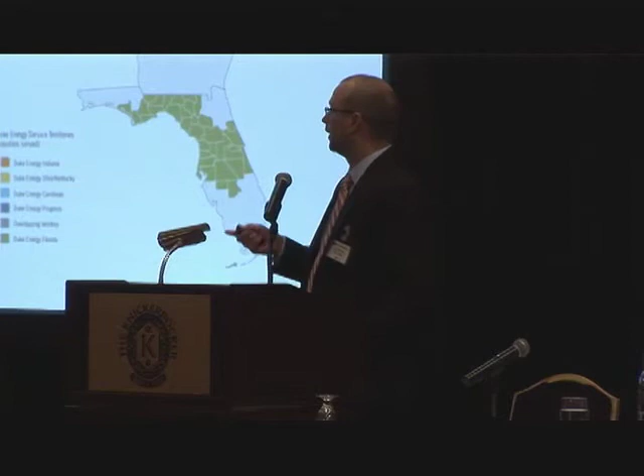If you look at our fuel mix across the entire company, it's about a third nuclear, a third coal, a third gas, but that doesn't always tell the whole story. You have to look jurisdictionally. In the Midwest and Indiana, we're really heavy coal. In the Carolinas, we've really worked over the last few years to have a good blend, so that's probably our most balanced jurisdiction. In Florida, we're kind of heavy gas, with only a few coal units left. So yes, we're a balanced company overall, but we have that fuel mix challenge, which a lot of folks talked about throughout the morning.

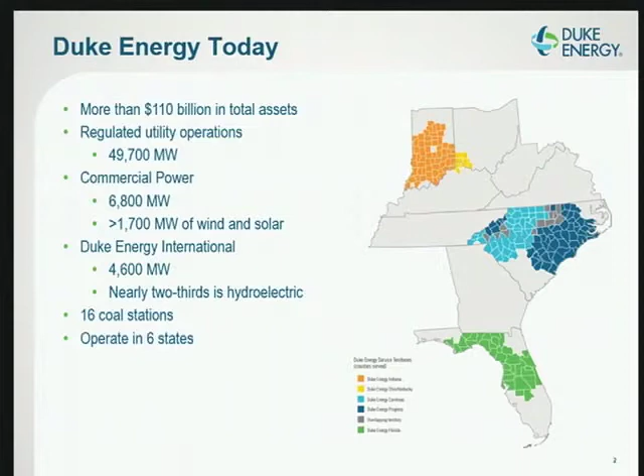This morning there was a lot of great discussion, a lot of high-level, fleet-level type stuff. I think we're going to take it into some more detail to piggyback on what Mr. Shea said. I'm an engineer, not a lawyer, so I'm going to focus on the technical aspects. As I go through the effluent guidelines, we commented heavily on this rule, and we have a lot of unique experiences to offer. So today I wanted to outline some of Duke's comments on the rule and how it was proposed. Hopefully you guys find that valuable, and hopefully it sparks some discussion.

So I'll talk about the rule, and talk about what a typical power plant impact might look like. Then I wanted to narrowly focus on two areas: FGD wastewater treatment, and compliance with effluent guidelines combined with the CCR rules. There's really a link between those two related to ash management, and I wanted to highlight those as well. I won't touch on every bit of the rule, but you'll get a flavor. I wanted to focus on those two things because they're probably the most important, or probably the biggest impacts.

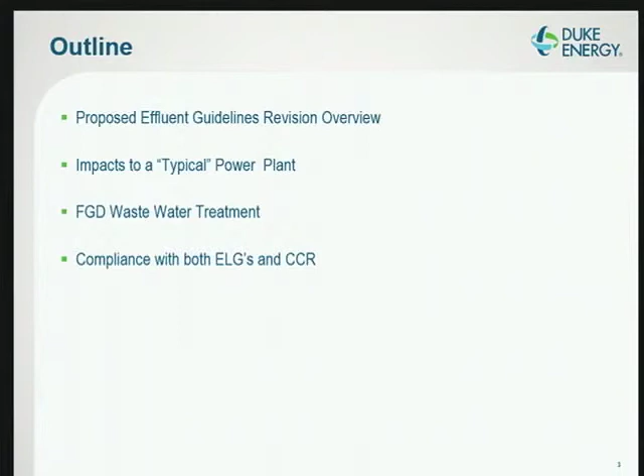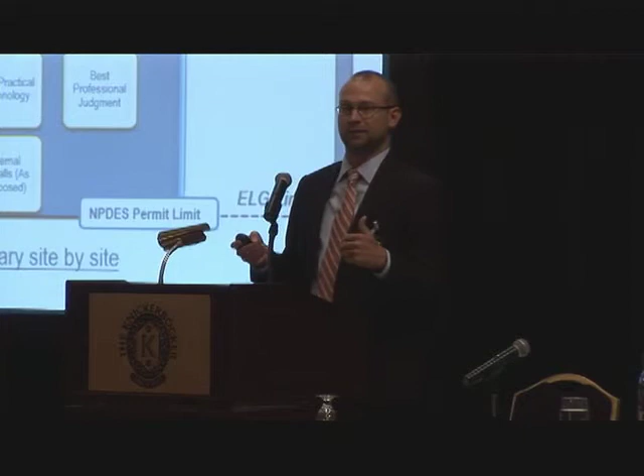So water compliance at a facility, related to compliance with NPDES permits, what does that look like for sites? We put together this diagram, and I originally put it together just to help me understand it, because it can be hard and confusing. There are three areas you need to focus on. One is water quality standards, so that's your general human health, agricultural standards, aquatic life standards, and then other regional standards.

An example of that would be the Great Lakes Initiative, or maybe ORSANCO along the Ohio River. So those set a certain limit. You've got anti-degradation, which is based upon the water body that you're sending it to — are you meeting de minimis thresholds into the water, basically are you impacting the water you're discharging to? And then the third is the effluent guidelines, which basically sets a technology-based limit, the best available technology economically achievable, setting a limit that is a federal standard.

So you mix those three together, and ultimately whatever is the most controlling or the smallest will lead to your NPDES discharge. And that last point is that the order can be different at each site, and can even be different within the site depending on the constituent. So you have to see all three. What this does is make NPDES compliance very site specific — there isn't a fleet-wide approach to any of this. I get a lot of pressure from my management, like, well, what's the standard box? What are we going to build? It's like, well, it's not that simple.

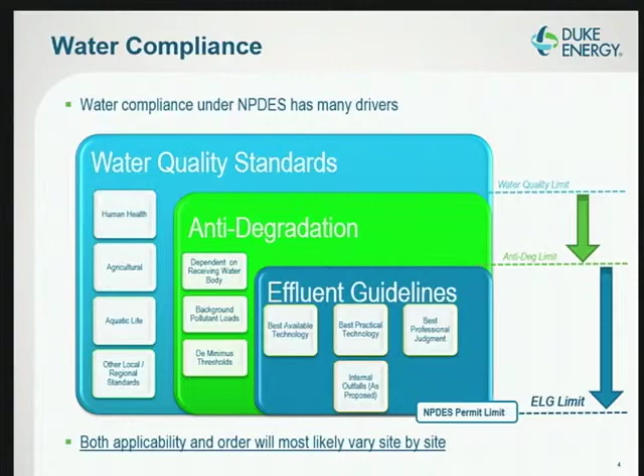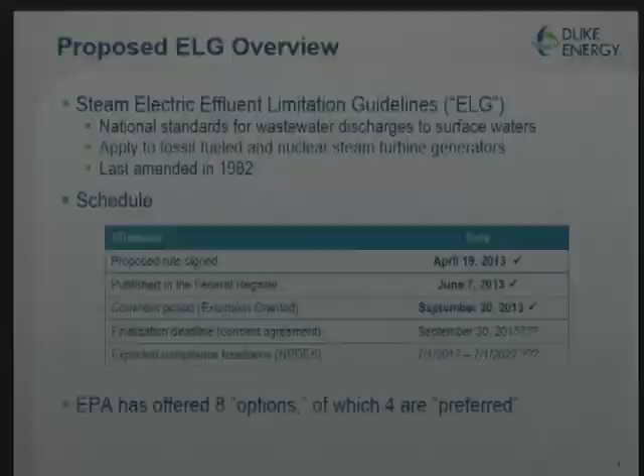So the effluent guidelines - I heard a gentleman before saying he was struggling with the acronyms. I'm going to probably throw a lot of alphabet soup at you, but effluent guidelines, I'll say ELGs. That's what I'm talking about, effluent limitation guidelines. You'll also see maybe SEEG, so steam electric effluent guidelines. They're the same thing. This is not a new rule.

It's just a revision of a rule that was last revised in 1982, so it was probably time for a revision. This, like other rules, was a court-ordered revision agreed upon. The rule was signed on April 19th of last year, published June, and then comments were finally due September 20th of last year.

Duke commented heavily, like I said. We submitted probably 300 some odd pages of comments. The finalized date was supposed to be May 22nd of this year. That was extended to September 30th of next year. So it got about an 18-month extension on that.

It's not clear what the ultimate timeline is going to be based upon that extension, but what you have to understand is it's all based upon your NPDES permit and when it will renew. So even though you got a year's delay, you didn't get a year's delay for your whole fleet. You just got a year's delay for that one guy that missed the window. So you maybe had two guys that moved from the front of the line to the back of the line.

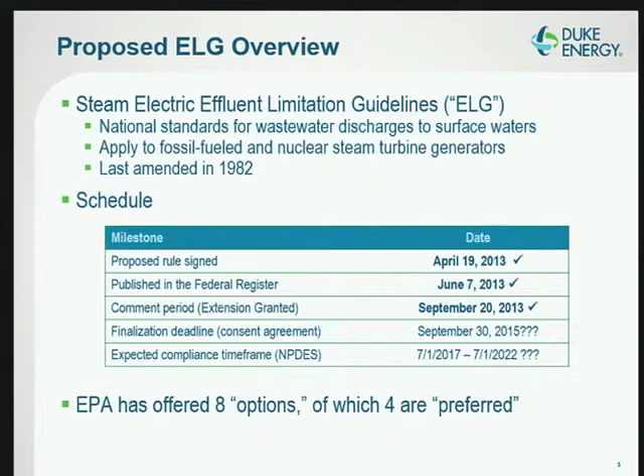The EPA for the rule offered 8 options, so a lot of optionality here. 4 of them were identified as the preferred options. These are the 8 options.

So one thing I wanted to highlight on this slide is that what the EPA is doing is defining 7 different waste streams, so they're adding it to other definitions. An existing definition would be cooling tower blowdown or low volume waste. Now there are new ones that are FGD wastewater, bottom ash transport water, leachate. They're defining new streams, and with those streams comes some sort of technology-based limit.

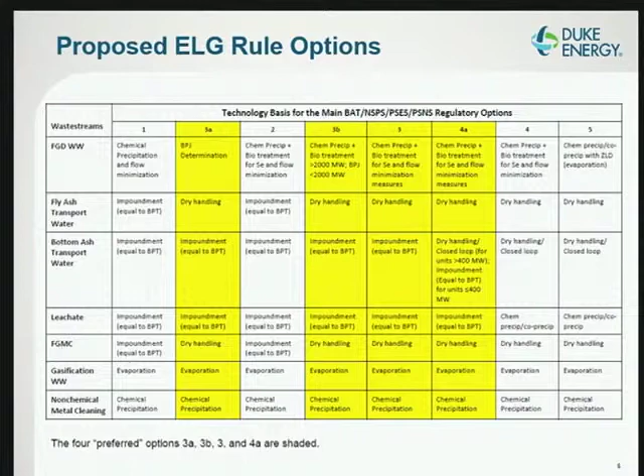I won't go through all this chart, but the yellow outlines what is the preferred options. And generally, as you go from left to right, generally it gets more strict. This kind of gives you a view of the preferred options. So you can kind of see some of the optionality here for these lower streams, fly ash all the way down to non-chemical metal cleaning.

There's not much optionality there. The optionality exists in the 2 that I wanted to focus on today, which were FGD wastewater and bottom ash transport water. And generally, again, you can see left to right it gets more strict. For FGD, you have BPJ, best professional judgment. Duke would not support that for many reasons or consider that light or lenient.

But you go from phys-chem system plus bio for units just greater than 2,000 megawatts, and then you eliminate that kind of cap on it as you go to the right. And then bottom ash - basically the continued use of impoundments until you get to that last 4A option, which is the dry handling for units over 400 megawatts.

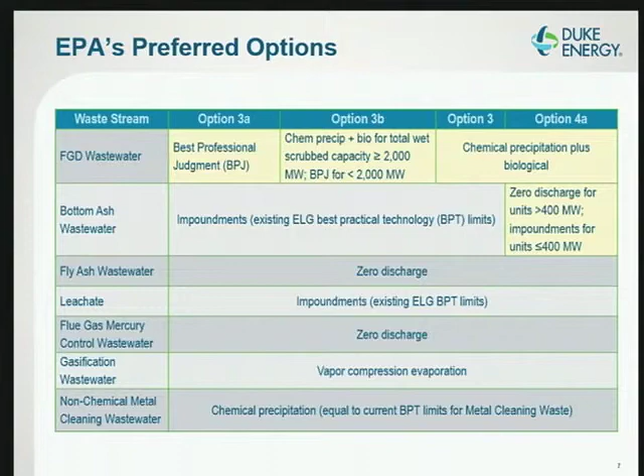In the rule, besides the waste streams, there's also these anti-circumvention measures. The first one is probably the most impactful one. Essentially what it says is you can't commingle the streams. You have to demonstrate compliance within that waste category before you move that water into any other category. So you can't kind of play the shell game for compliance here.

Also, you can't transfer effluents from a zero discharge established limit into another. So you can't just send fly ash transport water into low volume waste and say it's treated. And then the last one is sufficiently sensitive analytical methods have to be used. That's critical for things like FGD wastewater, which require dilution.

As far as Duke's comments here, probably the biggest thing is that we feel internal monitoring points are a bad idea. One, we don't think they're legal, that compliance points should be at the point of discharge. We also think it discourages things like water reuse, which to us is a key future for water management at our sites. We'd love to reuse our streams and keep our water consumption down, but we feel this prohibits that.

Another big one is the sufficiently sensitive methods issue. For those who've worked with FGD wastewater, it's very high in TDS and chlorides. I've learned from experience, don't send FGD water to a lab without telling them what it is, because they'll probably wreck their equipment. It requires a lot of dilution, so obviously the more you dilute, the higher your method detection limits are going to be. Can you measure down to the limits they've established? We would tell you, no, you can't.

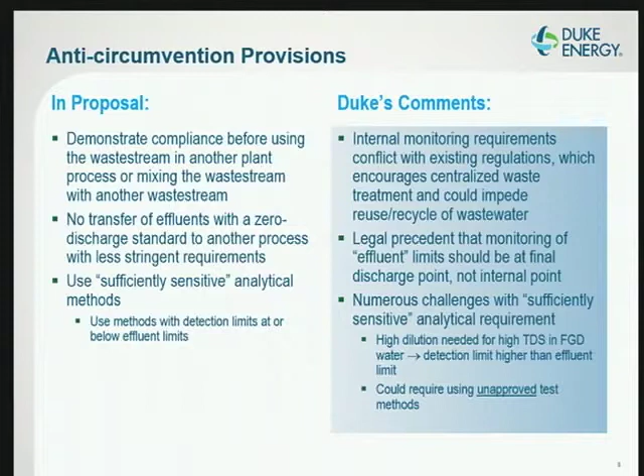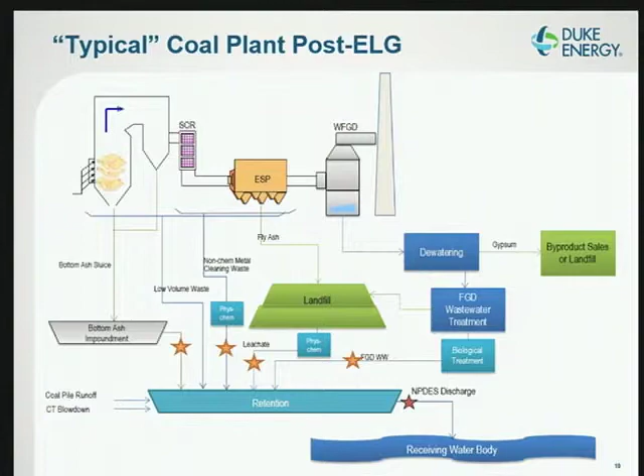In the future, you're going to take on these internal compliance points, because you can't commingle any streams until you've demonstrated compliance. So you have to meet BAT limits before you can commingle, giving you all these internal compliance points. Picking on bottom ash, there's continued use of impoundment for most options, but now you have to demonstrate compliance before mixing it with any other stream. Same thing for FGD wastewater - we feel a biological treatment step would be needed, as well as that internal compliance point. After all that treatment and internal compliance points are met, you still have to meet your existing NPDES discharge limits. So you can imagine a lot of compliance monitoring and process control related to doing something like that.

So for FGD wastewater, I wanted to go through the options that you have. Duke is a diverse fleet, so we have a wide range of options we've tried for FGD wastewater. I wanted to go through each one and talk about what's good and what's bad.

Settling ponds - we have 2 of those in our fleet. Essentially, they're solid settling devices only, and you also have to dredge those occasionally. So if you're thinking about getting something like mercury and selenium, which is the key focus of the rule, you're not going to get that with a settling pond. I'd say you're going to get some mercury, but it'll be the solid mercury - you're not going to get the dissolved.

Chemical precipitation - we have 8 of those systems. Right now, to us, this is the best path for this rule - they are very effective treatment devices, getting you 95+% there. But according to the process of the rule as proposed, it's not going to capture your nutrients and your selenium, so it's not going to do everything you need to do.

Biological treatment - these are the bioreactors, the ABMet process, if you're familiar with that. We have 4 of those. Again, they're the ones that are going to get you the nutrients and selenium - they'll capture that. So you can imagine you've got to have the phys chem and the bio working in concert to fully comply.

Wetlands - we have 2 of those constructed wetlands. Those are designed to go after something like selenium. One thing for them under effluent guidelines is they require dilution, so our read of the commingling requirements is you're not going to be allowed to dilute the water coming into it. So again, a major problem there. Vapor compression, evaporation, or some people call it ZLD - we don't refer to it as ZLD, we refer to it as thermal treatment or a thermal ZLD process.

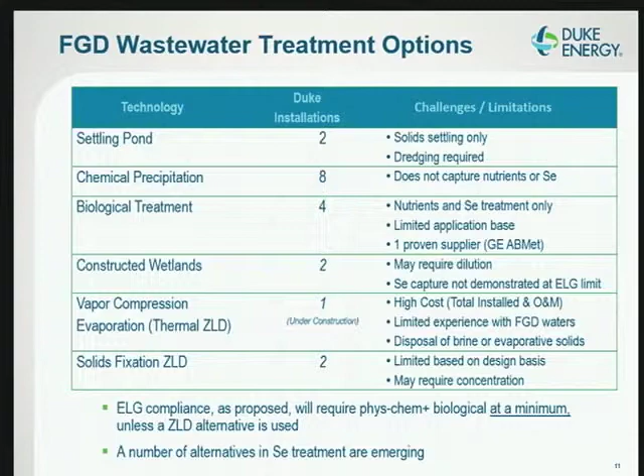So these are the limits for FGD wastewater. I won't hit on them, but the key points are arsenic, mercury, selenium, nitrates, or nutrients. The big thing for us is the selenium and nitrate limits were actually set by our Allen and Belews Creek facility. The arsenic and mercury limits were actually set by Miami Fort, our Miami Fort facility, and 2 other sites. So again, we felt like we were uniquely positioned to comment on this rule based on the fact that our facilities set some of the BAT limits.

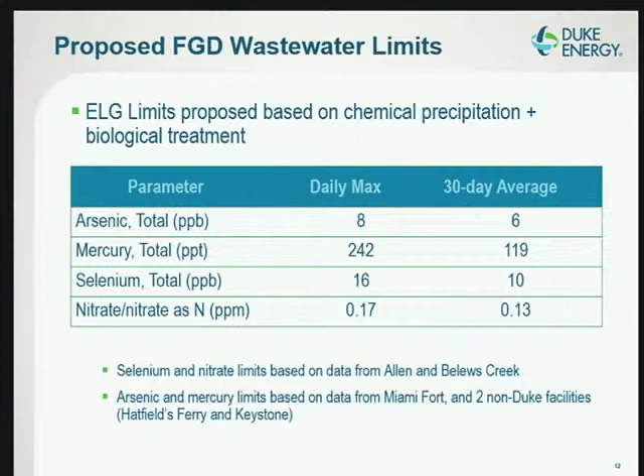So kind of hitting on our comments, we feel and support option 1, which is not a preferred option for them, but we feel that the chemical precipitation or the phys-chem system is the best economic and performance choice to remove pollutants. We also feel that those systems could probably be optimized to perform better, which is also in our comments. We feel that biological treatment and vapor compression evaporation or thermal ZLD are not economically feasible. We also think that the thermal treatment is not commercially available for FGD systems.

There's a number of flaws in their calculations. I won't get into those, but there was some method issues that we took issue with. Also, we do not support BPJ options. That's really leaving it up to each permit writer. And you might say, well, Brandon, why? For us, you're setting limits, you're setting a rule, you're making a revision. Pick one. We may not like it, but just at least pick one. And we'd rather have that line in the sand than to have a trend by our permit writers to continue to ratchet down. So really, it leaves it open - every time a permit is open, it leaves the option of thermal ZLD out there. And we just don't think that's a good idea.

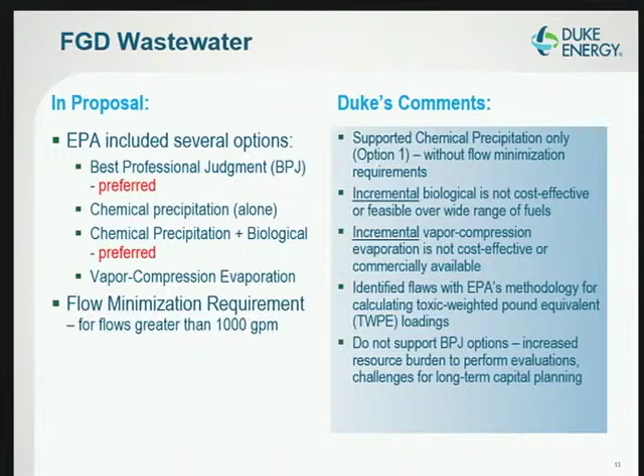So moving on to effluent guidelines and CCR compliance together, I think the nuances between the two - how do they relate? Well, CCRs really focus on the impoundments, so they're really the waste and the dikes, the dams, the groundwater monitoring, those structures themselves, whereas effluent guidelines focus on the water and the water that's discharged.

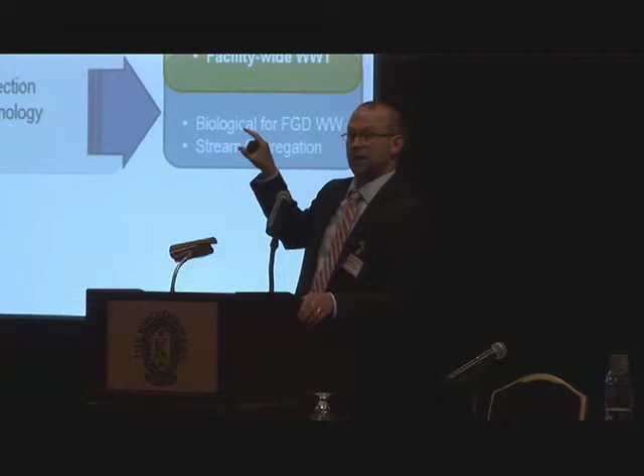They're certainly separate, but when you look at how you're going to comply, they overlap. CCR is going to lead to ash pond closures and lined landfills across fleets. Effluent guidelines involve stream segregation, wastewater treatment, that type of thing. You look at the combined effect between the two, you're talking dry fly ash and dry fly ash reliability type projects.

So a question you should ask is: I might have a dry fly ash system, but does it have a wet backup? It's a big question mark. I think you'd be surprised if you asked. Dry bottom ash, that's another one, and I'll touch on that the next slide. And then facility-wide wastewater treatment, like we talked before.

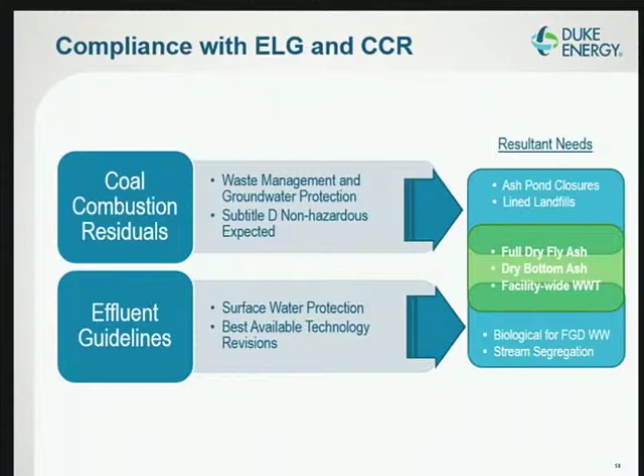You're going to have to manage things like low-volume wastes in a different way, because you can't just send them to your ash pond. And oh, by the way, have you thought about stormwater? Did your stormwater go to the ash pond? What happens when that ash pond goes away? Big question mark there.

For us, what did the effluent guidelines say about bottom ash transport water? Really, again, except for that strict preferred option, it allowed the continued use of impoundments, which we would support. We just don't think that they have the data. They're using data from like the 70s. There's flaws in that data. There's flaws in how it was grabbed. We just don't feel like they have the information to stand on a zero discharge.

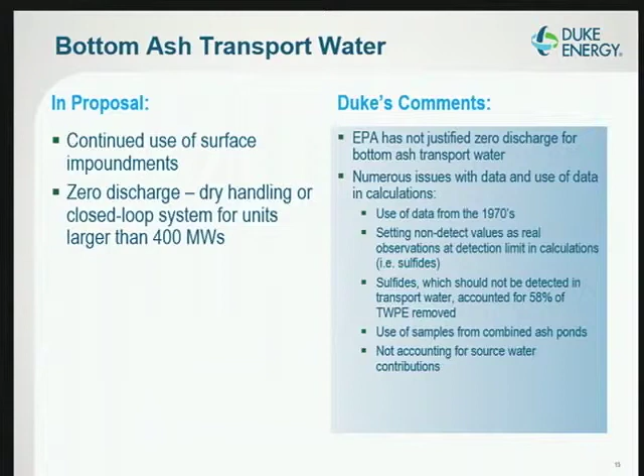So we're happy to accept the continued use of impoundments for effluent guidelines, but that still leaves the question mark up for CCRs. So what does that mean for my bottom ash impoundment that I have at the site?

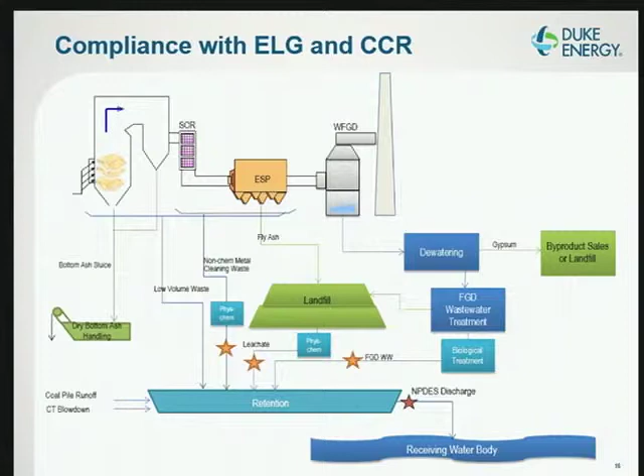So if you look at this, what are the options you have for dry bottom ash? When I say dry bottom ash, again, I got to put it in quotes because you got to define it. We would say dry bottom ash handling, or we would say dry bottom ash storage. And the reason why we make those definitions is that you've got these options for you.

You've got wet storage, which is really an impoundment. Again, CCR may make that cost prohibitive. Then you've got dry storage, which uses a remote submerged flight conveyor—for those who are not familiar with it, that's where you're storing your material dry, so it's no longer sitting in an ash pond for days, months, years. It's sitting there dry.

But you've got two options with the water side. You can recycle that water. Again, bottom ash is not that reactive. You can recycle that water and keep it going and not discharge it, or you could do a non-recycle mode and continue to discharge it. Again, we think it's very critical to maintain that option, and the reason is that we're going to need it to meet water quality standards on the back end.

Bottom ash sluice water, or bottom ash transport water, is relatively clean water. It basically looks, again depending on contact time, like your background water. It's a good tool to meet things like acute standards on the back end.

And what I mean by that is you've got FGD water that's got 15,000 ppm chlorides in it. I don't think the state's going to be very happy if you discharge that to the local river. You need those other streams to mix with it to get that concentration down. Again, we're not playing games with dilution and mass limits. We're just trying to meet those acute standards along with all the others.

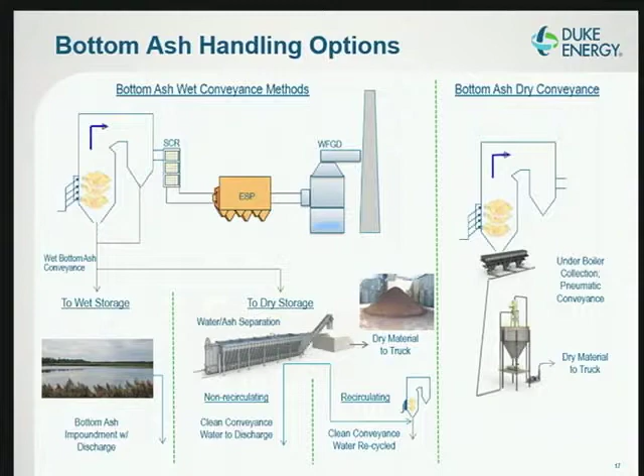In summary, wrapping it up, effluent guidelines in a nutshell: you're going to have biological treatment, some sort of selenium removal. We just default to biological treatment because that's our experience.

For FGD water, right now there's only one supplier for that. So other utilities are all going to be competing for that one supplier, or we're going to have to develop new technologies, which the market does have a few emerging that look promising.

The performance at those ELG limits, again this is part of our comments, is not really demonstrated at a wide range of fuels or operating conditions. Those limits were set by Belews Creek and Allen facilities burning Central App coal that basically just sat there and ran that coal all day. As part of our flex fuel effort, we burned some Illinois Basin blends, some Northern App blends, and all of a sudden we saw our selenium numbers go up. So a big issue there.

Non-chemical metal cleaning waste—I didn't touch on it much, but you're talking about significant water management issues and operational changes in your plant. Complete dry fly ash handling, I emphasize complete. We're talking new CCR landfills, reliability upgrades if you have a wet backup, and bottom ash if required, major retrofits to our fleet, and potential loss of that low pollutant loading waste stream, which is a nice management tool for your NPDES permit.

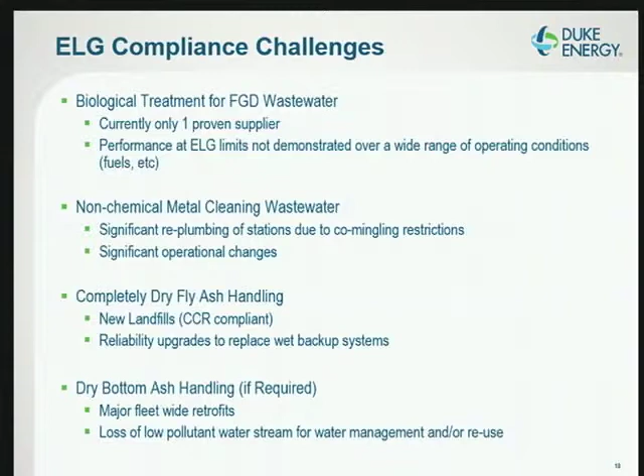So with that, I'll open it up to questions. How did I do on time? You're ahead of schedule, so we have time for questions. I thought I was behind—that's why I was talking a little fast there.

The Italian beef sandwiches put everybody to sleep? No, I'm sleeping. Jordan to the rescue.

Hi, Jordan Kessler, Department of Energy. My question is, given the timing they have on the effluent limitation guidelines, and I know they're shooting for September 30th of next year now, are there concerns over what happens in the final coal combustion residual rule and how that would affect the ELGs, and what would happen if the timing was flipped, if the ELGs were finished first and then the coal combustion residual rule?

It's a great question. I think we would prefer they come out on the same day. The big question mark for us is how much time the CCR rule will really give us to comply. Our assumption is about 5 years, and that's 5 years to start closure of our ash ponds, which for our active sites we would say is reasonable. If you give us those 5 years, and the effluent guidelines come 6 to 9 months later, no big deal—I think we can work with it. We would prefer to see the CCR rule first, so we're happy with how it's sequenced at this point. But if they came out the same day, that's going to make it easier because it takes the guesswork out of it.